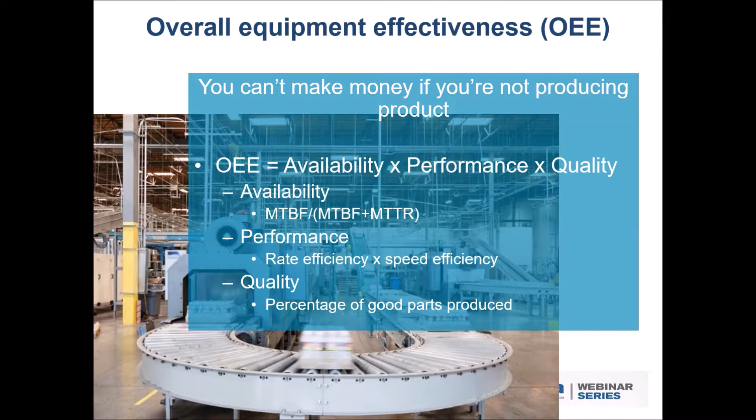And quality, of course, because it's not going to matter whether you get a ton of product if the product's no good and it can't be sold. So let's sit down where we want to go.

So motion control, in general, as I said, with these technology developments, vendors have really been looking to come up with solutions.

Solutions that are aimed at delivering better performance, more flexibility, particularly ease of use, and also supplying engineering services or guidance.

I mean, companies can certainly go to integrators for things like that, but a lot more motion vendors that I talk to are working very tightly with their customers.

And this goes back to that earlier slide where you're talking about lighter engineering staff. So they need stuff that is easier to get out of the box.

If you want to move motion technology into a non-traditional area, it's in your best interest to make it easy to use and to give them the tools that they need to apply it to their technology.

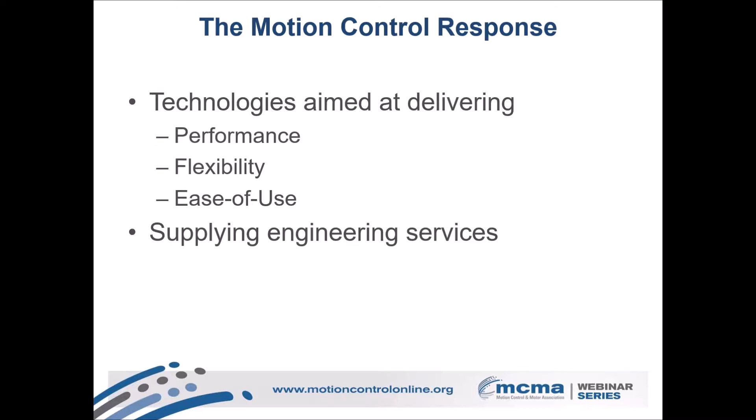Some of those that came up in the conversations I was having: auto-tuning drives. Now that's not exactly a wildly new technology, but there's a big difference between when the technology is released and when it sees broad adoption.

Also, auto-tuning drives initially didn't quite live up to the billing, so there's been kind of an upgrading over time. But there are also other aspects to motion systems that give better performance.

Things like direct drive motors that give you less compliance, and some other technologies we'll be looking at. Safety, again, safety's been around, but some of the options with the new protocols can really deliver some strong value propositions. We'll talk about that.

Network devices, and also software tools. Auto-tuning drive, the old way.

You get your motor and your drive out of the factory, yay, they're designed to work together, and then you hook up the load, and you got to deal with inertia.

And the way it used to have to go is you'd have to exercise the axis and do basically parametric PID tuning, and that was something that could go on and on. It could be straightforward, but I've talked to engineers who've said that they literally would spend days on some axes.

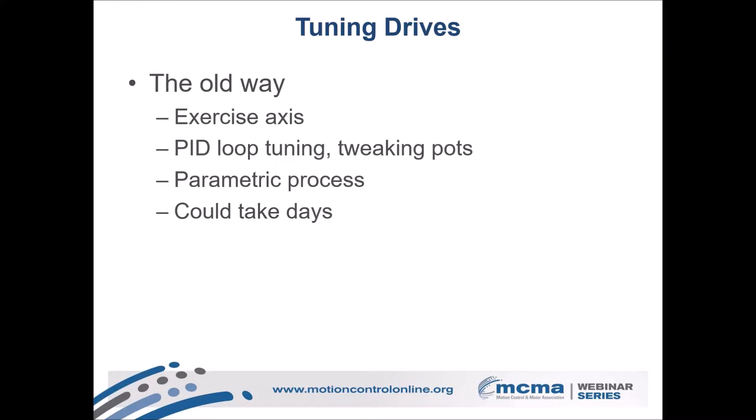Then we get into the ease of use, which is the auto-tuning drives, and there are a couple of flavors of that. You can get the ones that do straight auto-tuning that comes from the factory.

There's a canned sequence that the drive runs through, and that tunes it up. You can also put somebody to work with a screwdriver and get much tighter performance.

But part of what we're really interested in talking about here right now is some of the more reactive and proactive auto-tuning drives.

That respond to what's going on in the system, so that they're actually reacting to the real load and following what the encoder is telling them about.

Whether they've got error, they're adjusting parameters to drive that error to zero, and that's something that can persist as the drive is operating going forward. And then there's also the variation of being able to respond.

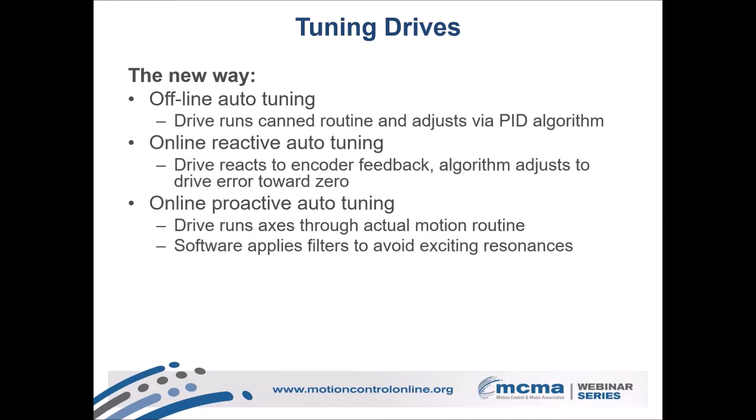To a motion sequence, find out what is causing vibration, apply filters to avoid exciting those vibrations, and really dramatically decrease settling time. And that's going to be key in what we're going to be talking about with the next few applications upcoming.

So with auto-tuning, the drive detects resonance and can run through, change the parameters. You get compensation. It can also assist with maintenance, which is going to be important later on when we're talking about predictive and preventative maintenance. But again, the key here is that it's responding.

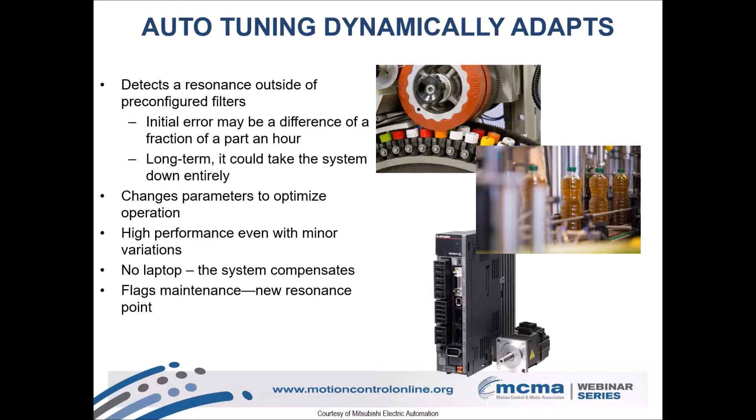And you can see the kind of effect that you can get, where you go from something that would slosh to something that would be very smooth.

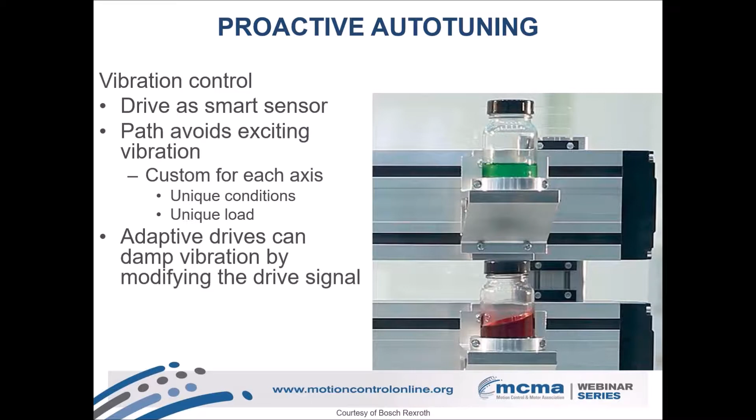So when you're looking at applications like electronic pick and place, for example, that's got to be fast point-to-point motion. The faster you do it, the more stuff you can make, the more money you make. So yay, that's all good. But if you get a lot of overshoot when you reach the target point, you're going to have settling time. That's going to slow everything down, or it's going to impact the quality of your product. In both cases, that's where auto-tuning drives can really come in and significantly affect the throughput and performance, and do it in a way that's easy.

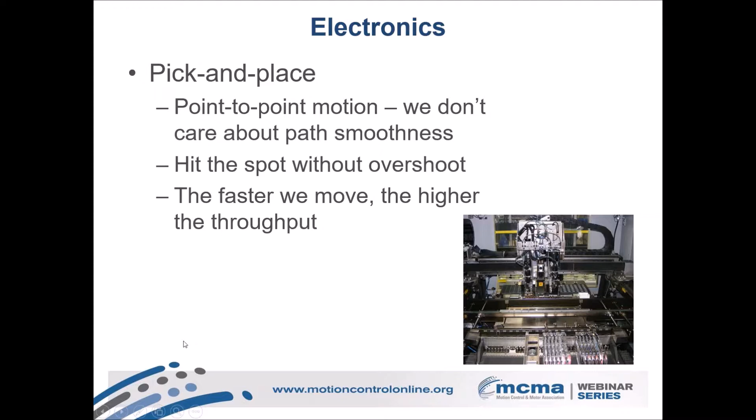And that's also important relating to the earlier point about needing to switch from part to part and recipe to recipe. You could, in theory, do this pick and place with somebody out there with a screwdriver doing manual tuning, but every time you change your recipe, you're going to be sending them right back out. If you've got an auto-tuning drive with reactive, adaptive tuning capabilities, you don't have to run through that whole process of sending somebody out. The drive's going to do it automatically. And in particular, the drive's going to be able to respond to that loaded versus unloaded scenario I was talking about earlier. And if you take a look, that can really make a big difference.

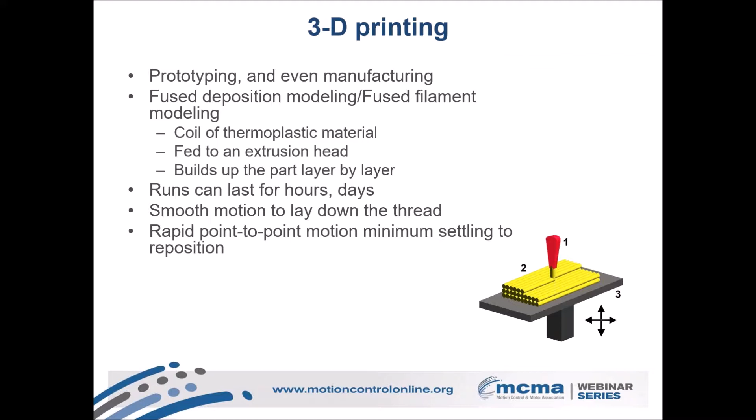Now, for a long time, the way to go was stepper motors. They're cheap, they're easy to integrate, they chug along, but you get the longer settling times. You can run them closed loop, but people typically don't.

But now there's an increasing trend toward doing servo motors because you've got the adaptive drives. If you put on a 24-bit encoder, you can have a lot of feedback that's going to help you with those uber short settling times, give you smoother motion. You're going to get faster builds, better performance. They're going to be robust enough to give you a long lifetime. So it's all good.

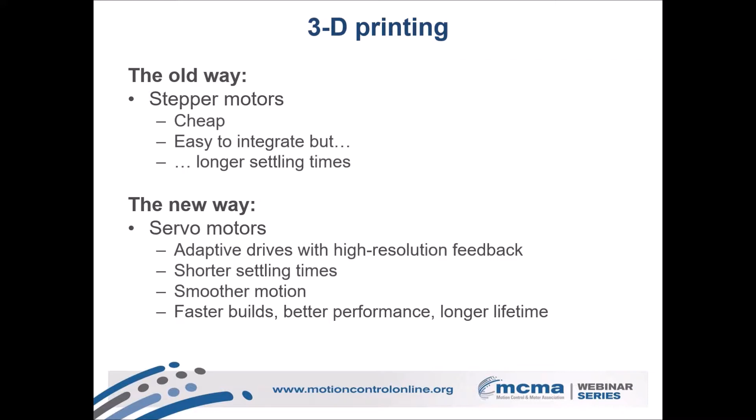Now, talking about the whole issue of usability and making it easy, wood processing is one example. Actually, adding it up, I think I've been covering this sector for going on 10 years. And it was interesting because when I first started out and would talk to the people in the wood processing area, it was kind of more along the lines of 'keep those servo things away from us, dang it. I want my AC motors and I want my cams. I'm very happy with my cams, and they work, they don't die, and I know how to work them, and maintenance likes them.'

It's been fascinating to me to watch the increasing levels of sophistication even in areas like wood processing, mining, steel, and so on, taking up more of the electronic technology. And in this case, the example is in wood processing.

Now, when the logs go into a mill, the first step is debarking. They chunk that stuff off, and then it goes through a rough saw that puts it into planks. The problem is, as probably everybody here who is an engineer knows, reality sucks, and logs are typically not straight, so they're going to be a little tilted. They may hit the saw skewed, so all of a sudden you're not going to get all of the planks out of a piece of wood that you necessarily would want.

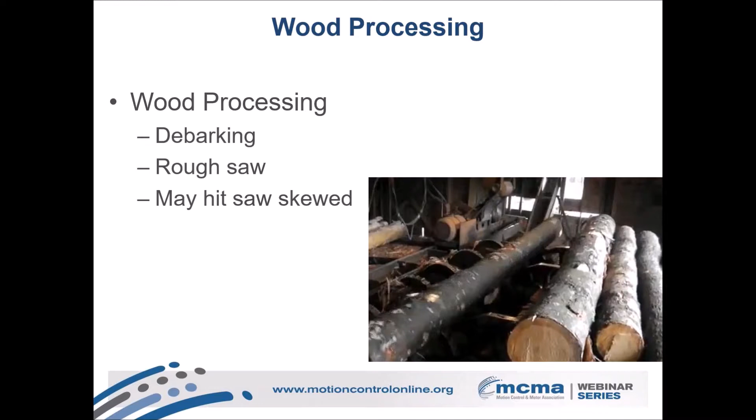So they previously had been able to adjust the blade angle in the saw by about 15 degrees, which helps some when things hit skewed. They got about 45 boards per minute, about a 50% yield from what they put in. I assume the rest went into particle board or whatever.

But because of easier use, servos and drives that are easier to use, easier to integrate, easier to maintain, they're now starting to move into using servo solutions. That buys them positioning of plus or minus 3 degrees. Yield bumps up. Now you've got 75 boards per minute and a yield approaching 100%.

Again, because you've got a much more adaptable system. But the reason it got into the sawmill in the first place is, number one, it's robust enough to stand up to conditions, but also it's user-friendly. It does the job without having the guy go out there with a screwdriver and sit there for a day. So that ease of use theme is one that really keeps coming up. It's not just performance.

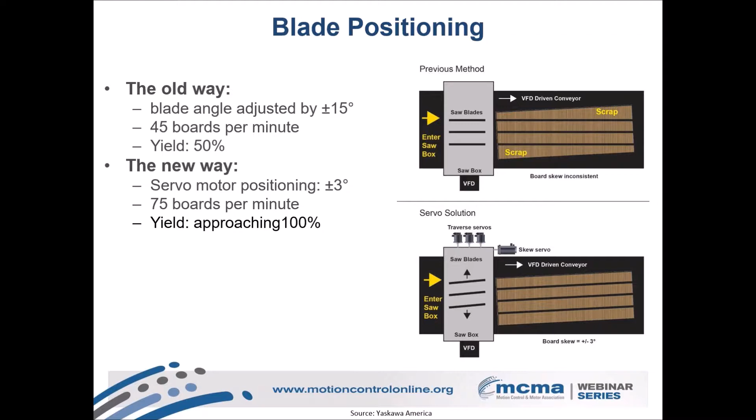Materials handling. Now here's another technology, but this is more along the themes of better performance and alternatives. Remember we were talking earlier about customization and how important it is for customers to be able to have customization, but in order to really execute that, that means manufacturers, your end users, need to have that level of customization as well.

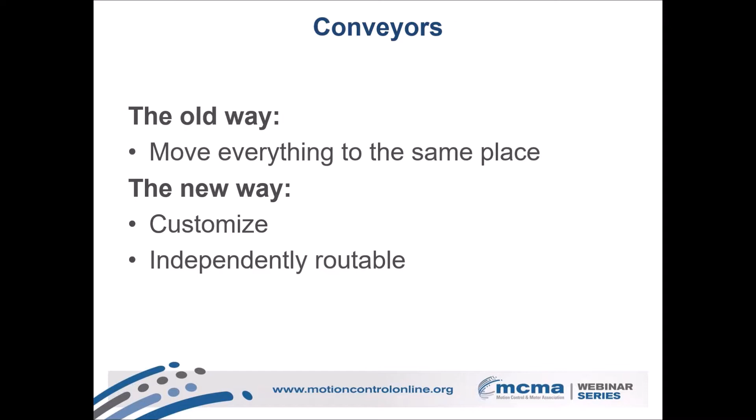Old school conveyors, great, things go on the conveyor, they go on the conveyor the same way, they go to the same place, same time. But that's not always what you want to do. So what they're looking at now is smart conveyors that are able to customize where material gets transported and that are independently routable.

Something interesting there is some of these intelligent conveyor systems. They've got autonomous carts that run on pre-configured tracks, but the route and positioning is not pre-configured. So you look at it as a motor split into two parts: the coils, your stator basically, that's in the tracks, and then the carts are your rotors. They have the permanent magnets.

You energize the coils, and obviously you've got to have a pretty good controller to run all of this, but you energize the coils, and that pulls along each cart so that you can route it. You get complete custom motion. You can position it where you want to position it. The spacings between carts can change. So there's a lot more choice involved. It's no longer let's be really good at doing the same thing over and over. It's let's get the flexibility to do different things and do them easily.

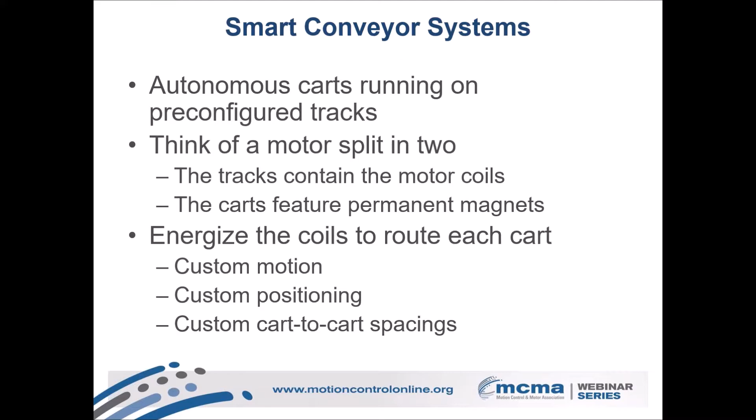An example of this is ARUP Laboratories, University of Utah. This is a big medical diagnostic center. They do 3,000 different combinations of blood tests, and they take tests from hospitals and clinics all over the place. They've got a 2-story refrigerator with up to 2.3 million specimens that obviously they need to be able to trace and track. And they have the intelligent conveyor system because all of this stuff has to happen really accurately, really traceably, and really quickly.

So 200 plus meters of track. Each meter has 60 motor coils, and that allows them to process as many as 6,000 samples per hour, with full tracking and traceability. They've got vision, and the ability to follow what's happening.

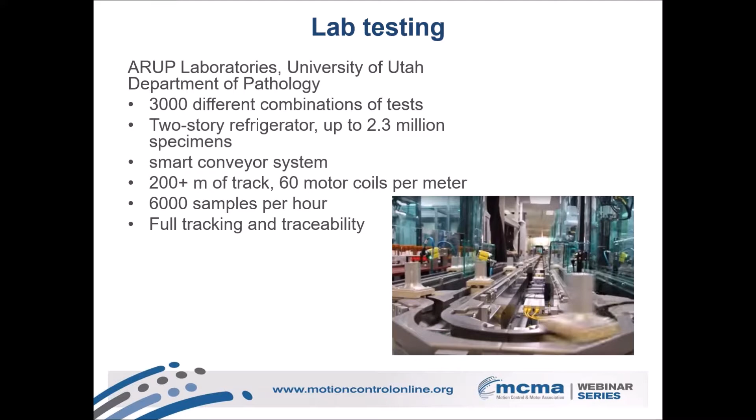So hold on. Let's see if we can do modern technology here and watch a video.

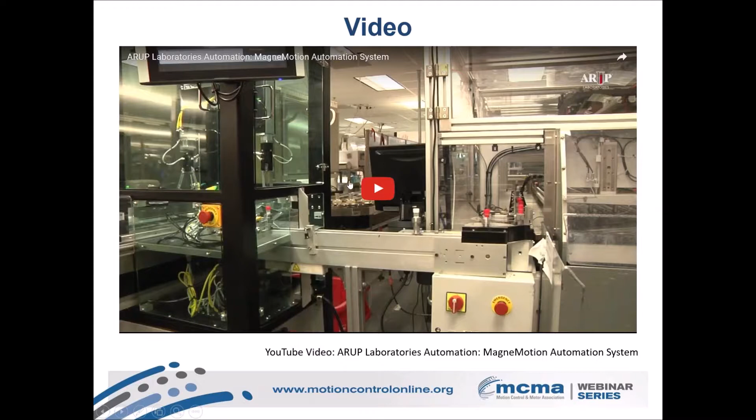All right, so this worked when I was practicing. Joanna, do you have any ideas here? Yeah, try hitting it again, clicking your mouse right on that play button. Yeah. There it is. All right.

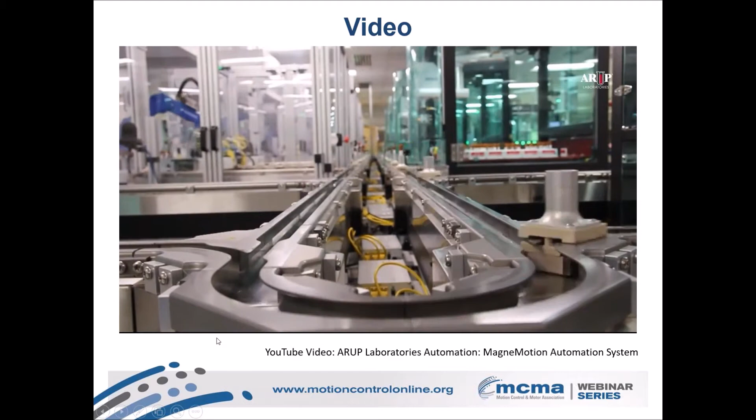There we go. So all these little guys are independently routed. If you notice, the spacings are different. They can make a pause.

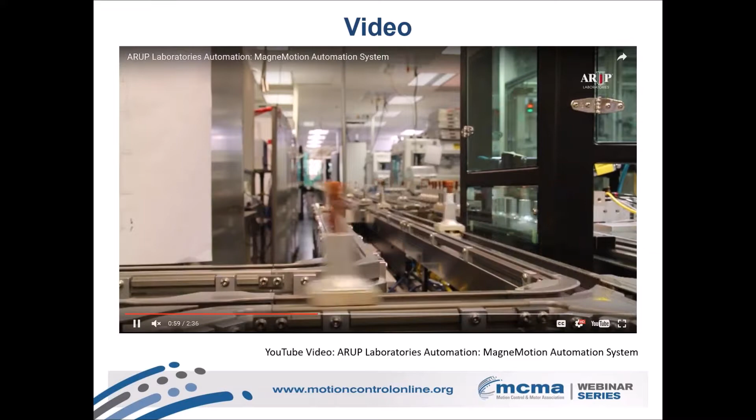So I just like watching them whiz all around there. All right, I think we've done enough of that. There we go. So there's that.

Other interesting things in life sciences: you've got a lot going on with DNA sequencing and cell imaging and so on. One of the overarching trends I'm hearing about is that diagnostic equipment for a long time really focused on steppers, but once again we got the theme that the shift is more towards servo motors now. As long as you've got the high resolution feedback and the auto tuning to minimize settling, you're going to get faster and better throughput. Now let's talk about direct drive motors first.

Direct drive motors, frameless motors, kit motors, they have different names, but basically, instead of being the servo motor that gets coupled to a gearbox and then coupled to the load, where you've got lots of compliance going on and of course some size, instead you've got a separate rotor and separate stator built into the machine, and that's going to give you a much smaller footprint. Definitely you're going to get less compliance because you don't have to deal with the coupling.

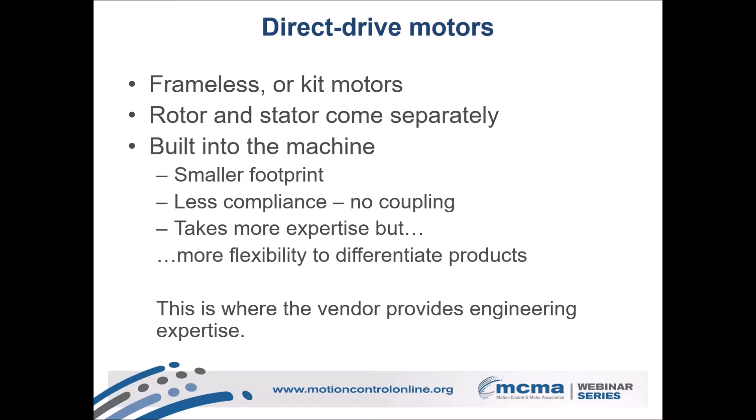This example originated, I believe, at the Cleveland Clinic, where they're working on stem cell activities. That's something where you can count cells easily, even in low amounts, doing DNA analysis using a technique called polymerase chain reaction, PCR, which lets you amplify the volume and do a lot of liquid analysis.

But it also damages the cells. What these guys want to do is be able to look at these stem cells closely, look at their morphology, watch them grow, see how they act as colonies, but also count them.

That's where the problem comes in, because they tried doing it with people looking through the microscope and counting, and it's just a really hard job. They have to do it through a narrow field microscope. They can't reposition consistently. One person counts something different than another. Sometimes one person counting today gets different numbers the next day. It's very hard to see something of interest and go back and find it again. So this group really wanted to find another way to attack this so they could continue their research.

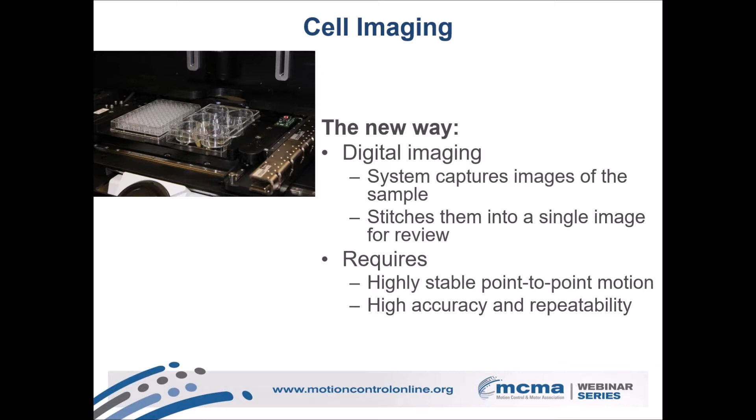So what got pulled together on this—photo credit Parker Hannifin—they did an automated imager with a wide field microscope, CCD imager, and the XY stage is based on direct drive motors. Instead of having to do the gearbox and couplers and all of that, they did direct drive, partly because they wanted a really low profile on the sample positioning.

With any of these, the wider the field of view, usually the more narrow the depth of focus. So you don't want the sample too far away from the microscope—you want to be able to really get in there. These devices wound up with 0.1 micron positioning repeatability.

Initially it was developed as an experimental system, but my understanding is Cleveland Clinic, along with several other organizations, are now working to commercialize this as a system for sale, so other organizations doing this kind of research would be in a position to buy it. It really could forward that technology.

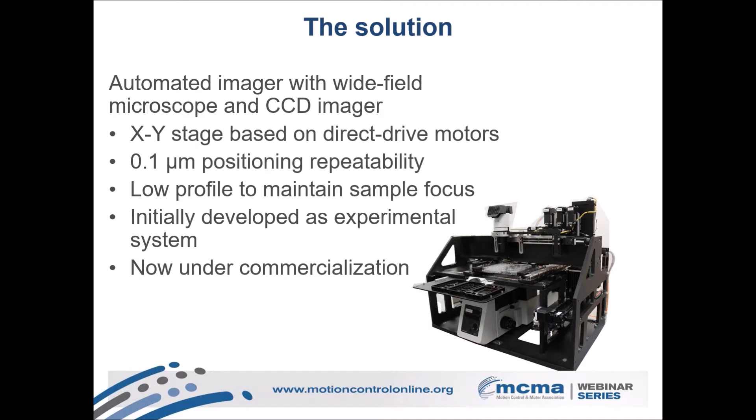Another factor is safety. I was talking with someone just the other day who said it's been out there for a while, but it really just seems like it's only now being taken up to a level where people are really taking advantage of it. There's safety, and there's safe torque off, but you can go a whole lot further with some of the new safety drives and safety PLCs. I'm going to give a couple of examples of that here in a minute.

But you wind up with the ability to speed productivity, optimize operations—you can even simplify maintenance. Because it's important with safety—obviously, OSHA, you don't want people to get hurt. That's first and foremost, the most important thing. But you can also use these technologies to protect equipment and to operate it more effectively, in a way that lets you spend more time making things and less time taking care of things.

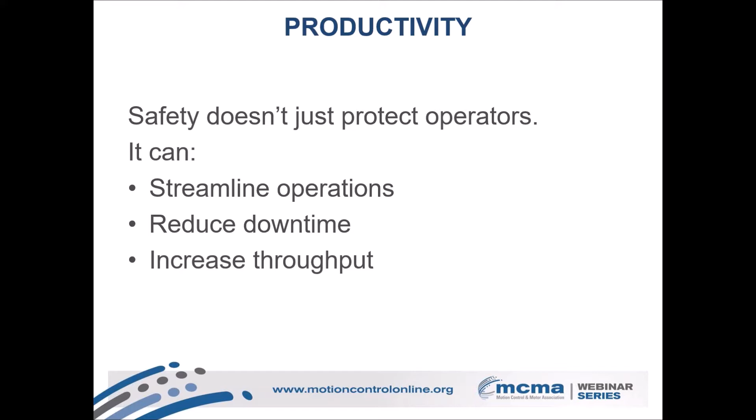Printing. If you're cleaning rollers, you clean and jog, and that can be very time consuming. But with some of these safety components, you can use safe direction, you can use safe speed, and suddenly instead of doing clean and jog, you can be doing that continuously. And machine builders can even design that in, so you'd have an automatic cleaning routine. Less time spent on maintenance means more time in operation. I can give you a direct example of that.

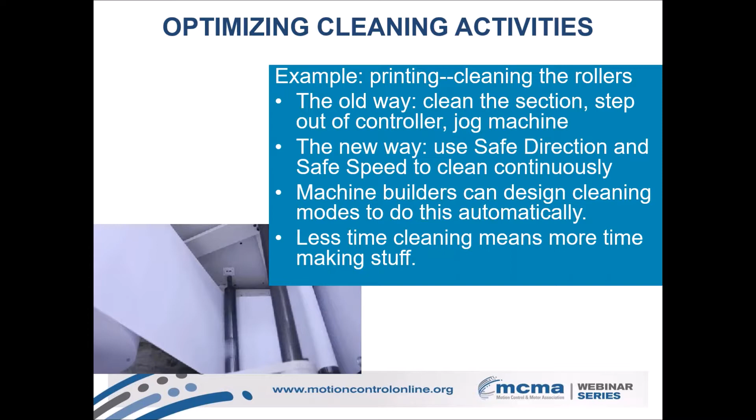Food and beverage. This is a food and beverage manufacturer. Again, they did a clean and jog - clean, get out of the enclosure, jog the machine, go back in the enclosure, turn it off, go back in, clean, go back, safe torque off. It took 6 hours a day to do that. They put in an advanced safety system that let them use safe speed and safe direction, and also a safe position protocol, so they could do limited safe operations even when the enclosure was breached. That sped up the cleaning process to less than 2 hours a day. So it goes from 6 to less than 2 - 4 hours, half a shift of production. That's kind of an example of where safety really goes. It's not just light curtains to keep people's fingers from getting munched. It's let's make the technology work.

This kind of goes to the secondary theme that I heard when I was talking with people, which was not just new technology giving us entree into non-traditional areas, but traditional manufacturing areas doing a better job at what they do by adapting some of the new technologies that are out there.

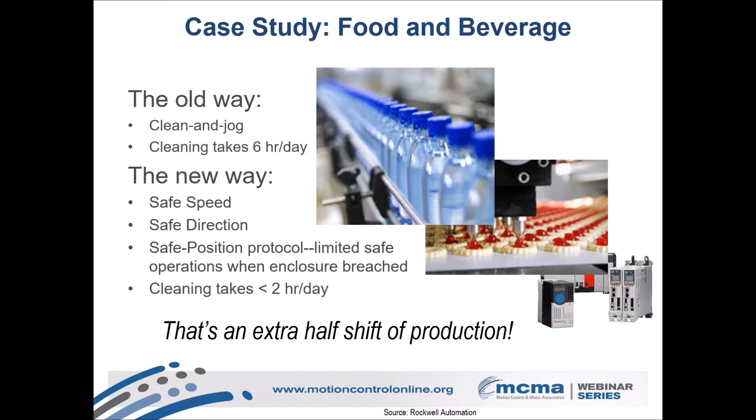Second example of this: electronic fuel injectors. In this case, the operator had to break a light curtain to adjust the part and the machine pulled away. They did have fairly sophisticated safety because they were able to use safe limited speed to pull the machine away rather than have a safe torque off. But if you analyze the application, the risk was really if the motion was moving toward the operator. So what they were able to invoke was safe direction - meaning that as long as the machine was pulling away from the operator, it could go at top speed instead of safe limited speed. That resulted in a 10% reduction in cycle time.

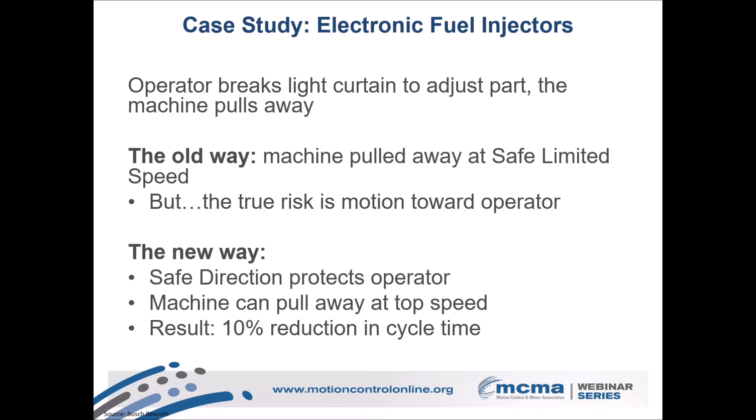Now, this part is really kind of getting more into what I've been hearing a lot about what's going on in your traditional areas - again, like pharmaceutical, consumer packaged goods especially, also food and beverage. It's got to do with using some of the technologies for network stability and so on.

Initially, what I was hearing a lot from, especially analysts, was that the OEMs are the ones who are really excited about being able to do all these analytics and have their machinery online. The end users don't really care all that much. In the last 6 months, that really seems to be changing, because increasingly when I'm talking to people, I'm hearing that your big food manufacturers, your big consumer packaged goods companies, want any edge they can get. If you're making diapers and you figure out a way to make one more diaper an hour, that's an edge - or one more diaper a minute, that's an edge. And that's something that we can add up. Remember back to the electronic pick and place.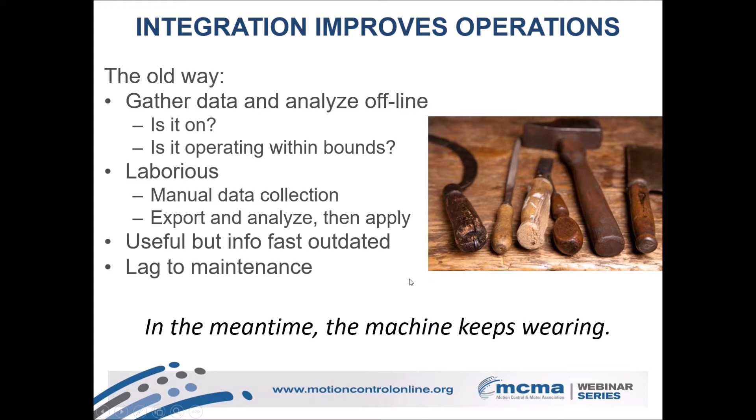So let's run through me waving the flag here, which is: there was the old way of doing it - do it by hand, yawn. We don't do that anymore, or we don't have to, because you've got technology on your smart components that can gather that information and deliver it up to the operator so that they can maximize and minimize idle time, changeover time. They can adjust in-feed speed. They can adjust scheduling. You can do analytics comparing how all of your machines are operating.

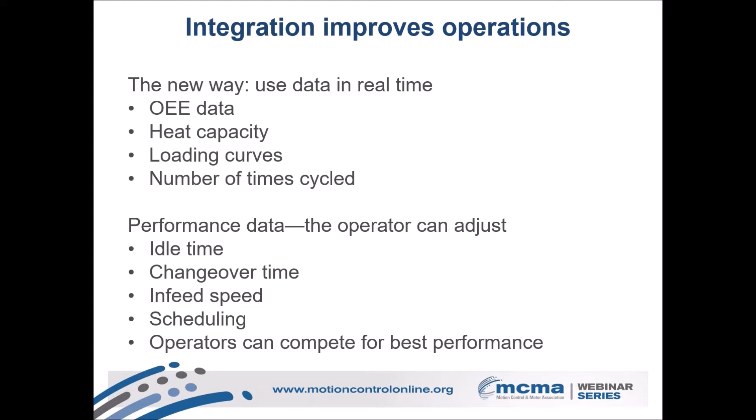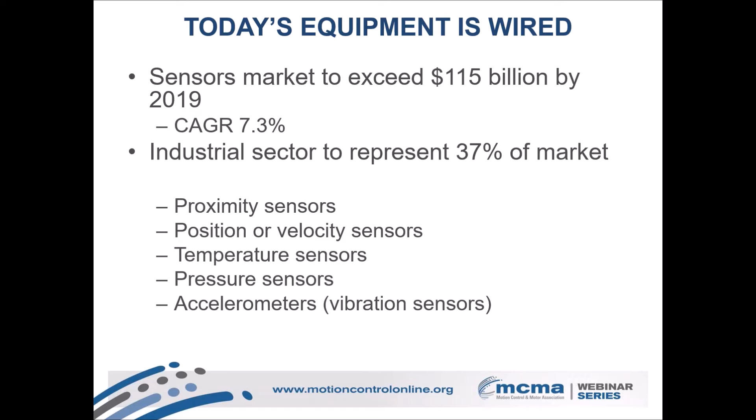Part of the reason we can do a lot of this is because we have equipment that can be connected, and very often the equipment that's out there could be handled this way if people want to do it. You've got various kinds of sensors so you know what's going on with the equipment, and then you've got the ability, because of network level connection of components, to send that information wherever you want.

That was one of the things that really came up from the usability standpoint, talking to folks for this project, which was end users and OEMs like the fact that you've got network-ready components that you can run your machine networks, plug in, get to the whole machine, and find out what's going on with the equipment.

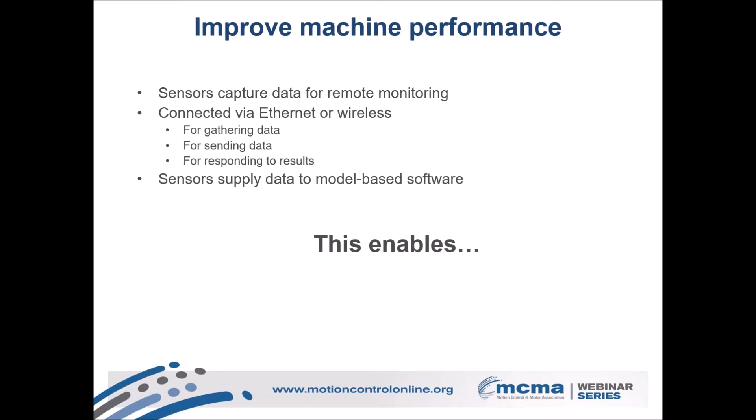So the question is, how far do you take it? You can get that data, and if you're running it via industrial Ethernet, you can pull it together, send it off to people on the top floor for analytics, communicate to other machines for better operations, and also get it to your maintenance department, which gives you predictive maintenance.

This goes back again to that ease of use, to making OEE better, because you're going to help reduce your downtime, since the sensors and information you're getting from your components help you figure out what's happening in advance. It used to be something broke, you fixed it, and then it turned into fixing it on a schedule whether it's broken or not. But now with the technology that's out there, you can do predictive maintenance, which tells you in advance whether you've got a problem.

You can be monitoring how much wear is on the equipment, but you can also look for damage frequencies. If there's a change in that, then you know there's something going on, and these systems can notify maintenance, so that maintenance can either take care of it or maybe change how they're operating the machine.

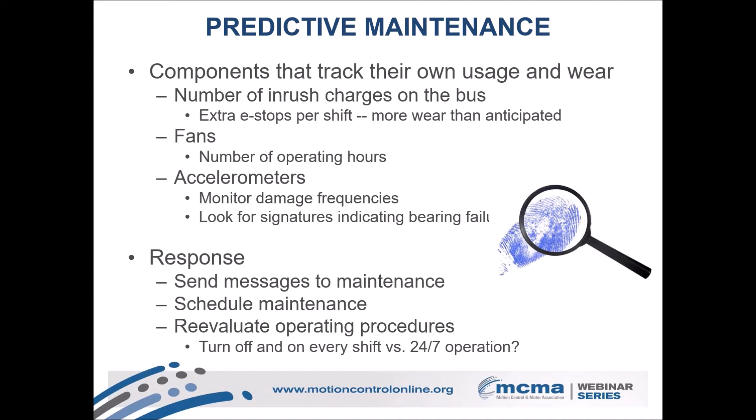One of the things I've heard from maintenance folks as well is they get a day of downtime, or once a month, once a quarter, and they usually have to figure out how they're going to spend that time, because there's just not time to do everything. This kind of thing can really help with getting that visibility.

Now, there is a caution here that goes back to the adaptive drives I was talking about earlier in the discussion, because adaptive drives are designed to see issues showing up with the machine and adjust automatically to help optimize performance. The danger there, just to keep in mind, is that it can mask one of these problems.

So it's really important to make sure that in these kinds of systems, it's set up, as I was talking about earlier, to notify maintenance and operations: hey, I made a change, I saw something different, I'm going to keep everything running okay for now, but you need to keep an eye on it. Just something to keep in mind.

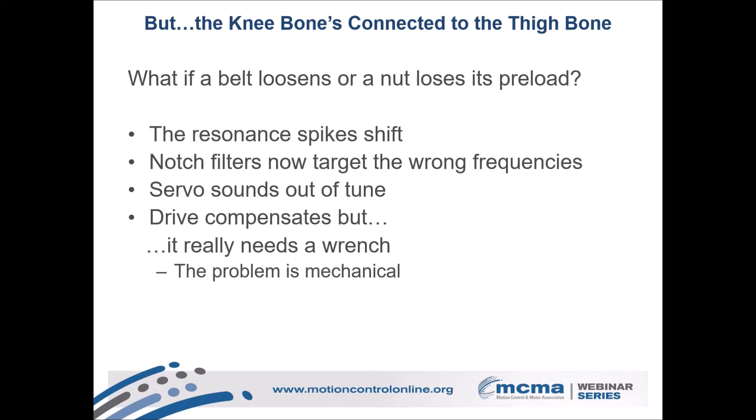But again, the benefit of the connectivity is that it can minimize downtime. It makes it easier to manage the equipment, lets people reduce inventory levels because you've got a more flexible system, greater degree of customization, and lower costs. The equipment becomes sort of an easier to manage set, if that makes sense.

Let's take a look at one example of how that might manifest in the real world. So you've got a beverage packaging line, and all of your equipment is connected. Your machine jams, and you've got intelligent line control because the status of all your machines is being overseen by your supervisory system. So now one of the upstream systems can slow down, the downstream system slows down, you've got more time to clear the jam, and then the line goes back to full speed. So overall, instead of having to shut everything down, you're able to just have a slowdown.

This kind of moves into where we're starting to talk about manufacturing execution systems, SCADA systems, and GeoSCADA, where you're not just communicating across the factory floor, you're communicating at multiple facilities. So if this kind of slowdown affects the facility elsewhere, you're able to transmit that information.

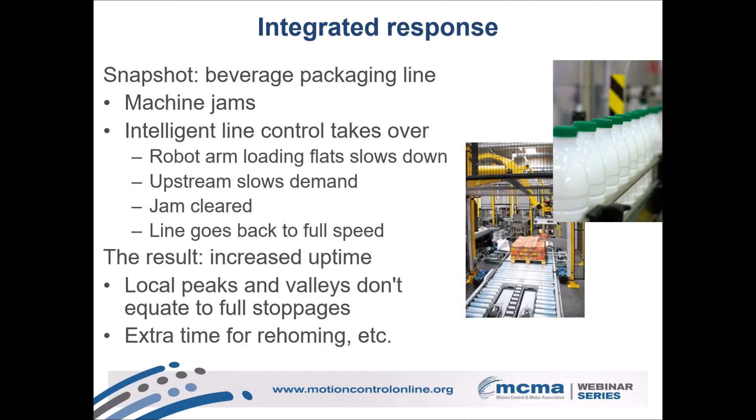And then one last thing that is starting to really attract a lot of attention, a lot more buzz in the end user community, I'm told, is power management.

Servos, about 25% of the servo system operating costs is represented by energy. And also energy costs can be controlled by when you're using that energy. You get dinged for your peak energy draw. And if there are ways that you can adjust your demand so that maybe you're not doing high energy activities during the peak daylight hours, or you're spreading them out instead of doing them all at once.

You're doing something so that you don't wind up with a massive energy spike. Now, that's created a lot of interest in energy monitoring, and this is where we get into one of the trends I was talking about up above, which is software that comes pre-configured and so on.

Now, there are ways to do it yourself. It's expensive, it's not easy. It's kind of like trying to do an ERP system yourself. But increasingly, there are purpose-built energy monitoring systems, not just in hardware, but in software. So you've got systems that are pretty straightforward to put together, and you can get really granular data out there, because what you need is to understand what the system is doing. You can't make decisions until you know about that.

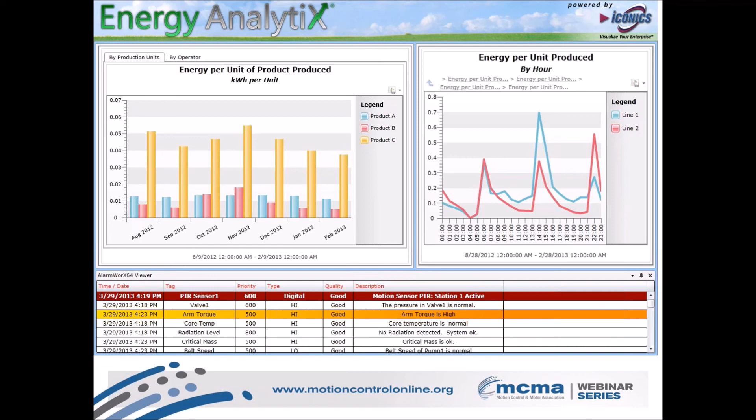So there's that, and I believe that brings us to the end. So yeah, to me, the dominant theme based on talking to people is really in the vendor community. The big focus has been on ease of use, and that's creating a lot of new applications. The other thing is performance improvements that are really starting to further some existing applications. Key technologies, again, auto-tuning drives, intelligent conveyors, frameless motors, I've been hearing a fair amount about. Networkability, definitely, and the pre-configured software. And with that, I think I just snaked in under the hour.

So Joanna, I'm going to turn that back over to you.